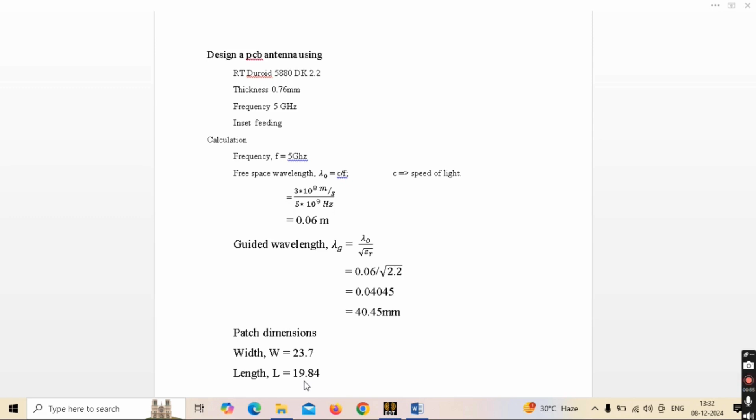calculations. I'm using a Rogers 5880 with a dielectric constant of 2.2 as the substrate material that has a thickness of 0.76 mm or 30 mil, and at 5 GHz our lambda is around 0.06 meter, whereas using the dielectric of 2.2 the lambda g, guided wavelength, will be 40 mm. So this is the patch dimension. You can do manual calculation or use online calculators to find it.

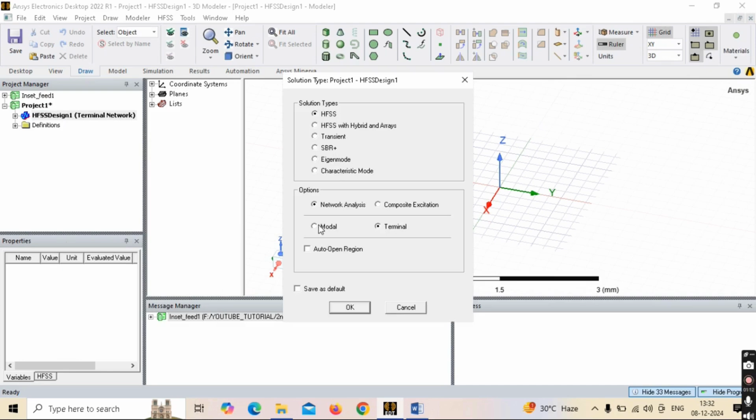So let's get started. I already designed it once. Let's start from scratch. So under this draw tab, I'll click on this rectangle and draw a rectangle. Then click on this rectangle, create rectangle, and here I can access the value. Usually I'll be keeping the dimensions as variables so that I can change them when and where needed. Let's keep the X axis as L. Let L be 19 mm.

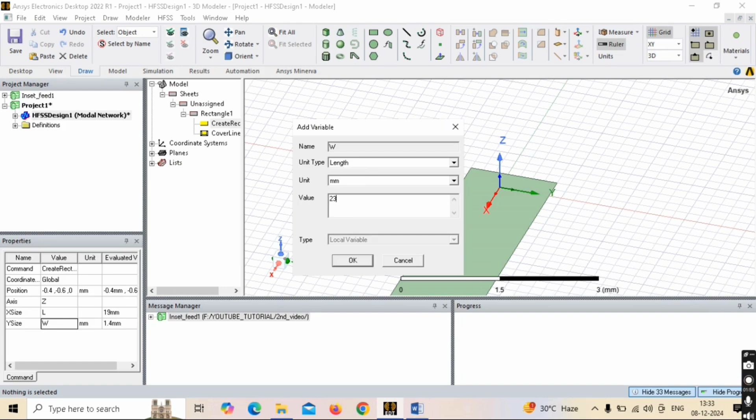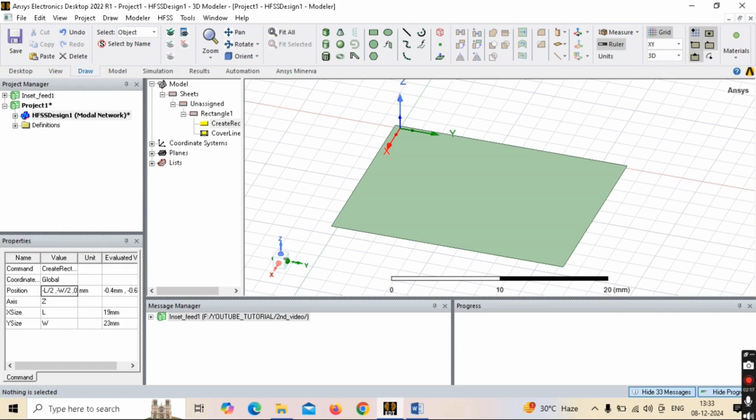Along Y, W to be 23 mm. Press Ctrl D to zoom out. Now again we have to center it. So this position I'll be changing. For X it will be minus L by 2. Along Y it should be minus W by 2. So I position my rectangle in the center. This is going to be my patch.

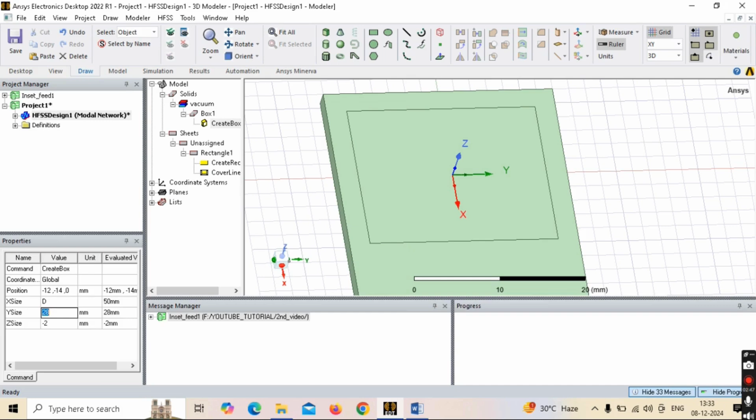Now let's create the substrate. The substrate dimensions actually depend on the scan requirement, but since here it is a single patch, I am giving an arbitrary value. Let's say 50 mm along both the axes. And the Z size should be the thickness of the substrate. Actually, there are standard sizes of substrate available, so you can check on it.

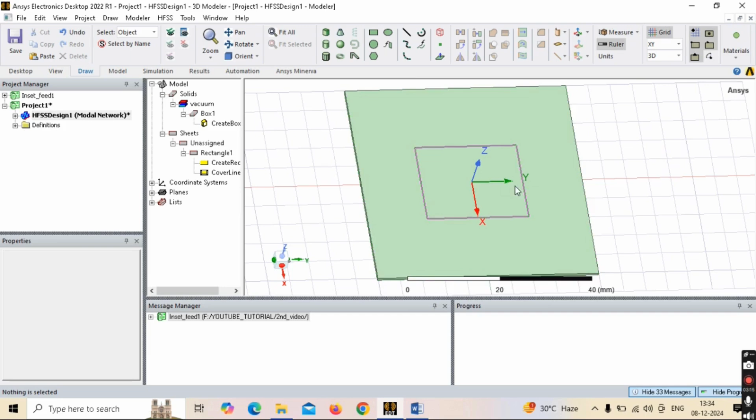Similarly, I'll be positioning it in the center, so the X position would be minus D by 2, and the Y position minus D by 2. Z should be at 0. So I got my substrate in the center. See.

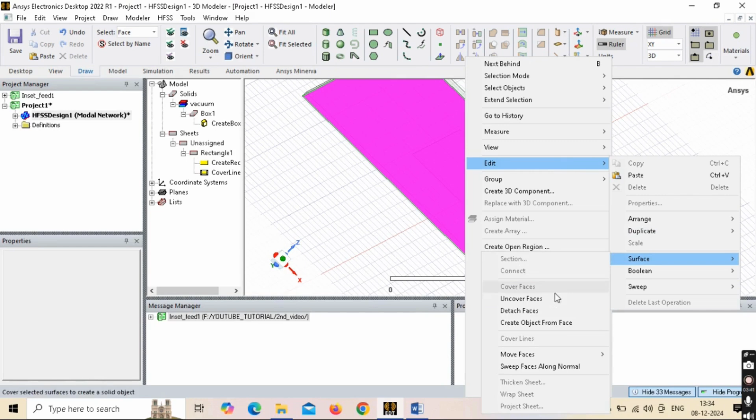Now let's create the ground. Actually, it depends on how you model. As you start modeling, you will find so many techniques. So here I'll select this bottom face. I'll click edit, surface, and create object from face. So I'll get a sheet at the bottom. I'll assign all the materials at the end.

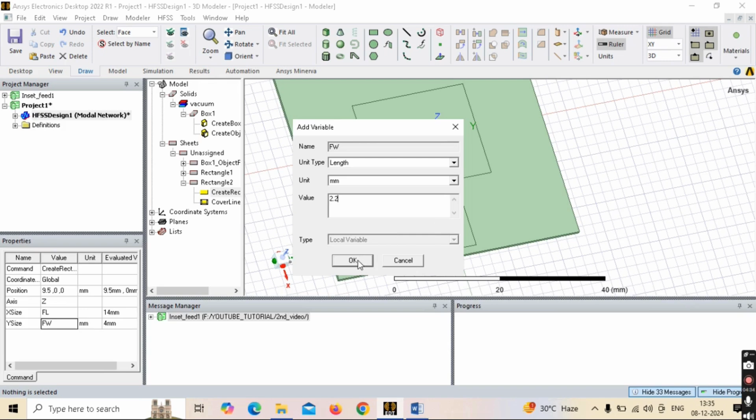Now let's design the feed line. Again, I'll click on the rectangle. I'll just draw an arbitrary rectangle because I'll be modeling the values inside these properties. Along X, it will be the feed line length, so I'll put FL. Let it be 14 mm. And along Y, it would be the feed width. This will be FW. And it should be 2.2 or something like that. Again, for the line impedance, you can use online calculators for a 50 ohm line.

Now let's position the rectangle. Along X, it should start at the edge of the patch, that is L by 2. And along Y, it should be minus feed width by 2. So now you can see the feed line has been positioned properly.

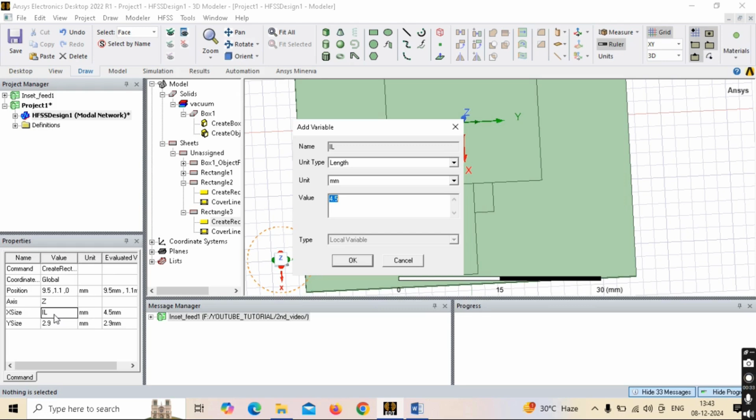Now I'm going to cut at this edge of the patch to make the proper inset feed. So again I'll create an arbitrary rectangle. Again I'll be modeling the values inside these properties. Along X, this will be the depth of the cut. So let us name it IL. Inset length will be 5.4, and Y will be the width of this cut. That will be IG. Value will be 2 mm.

Okay. So now I'll position it properly as needed. Along X, it should start at L by 2, and Y should start from the edge of the feed width, so it should be FW by 2. Let's see. But I need to take it towards the patch, so I'll make the X size minus IL. So it will go in the opposite direction.

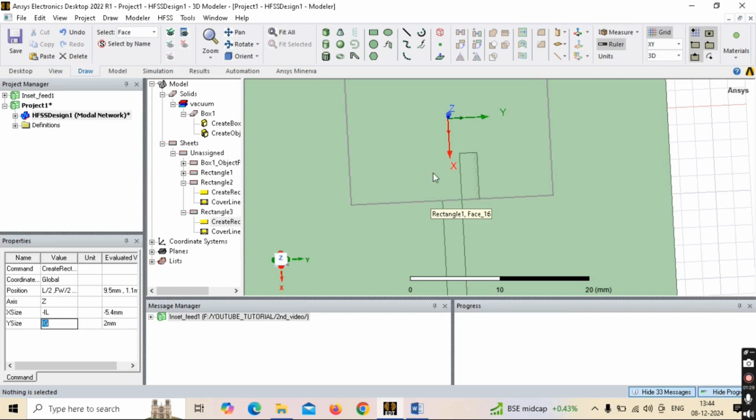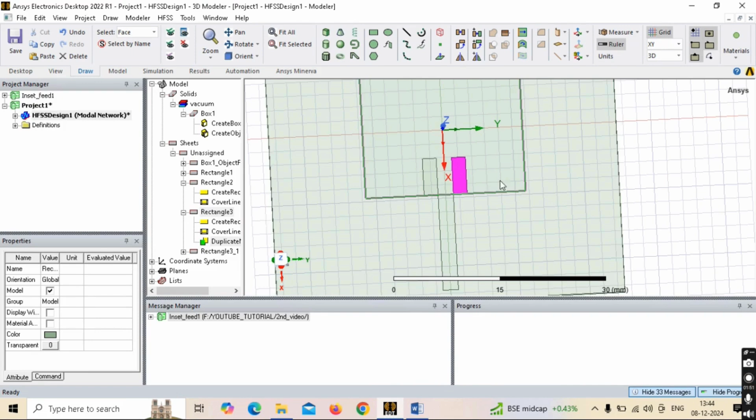I need to have a copy of the same thing on the other side. So I'll select this rectangle and choose mirror duplicate. I'll click at the origin and just drag my mouse towards negative Y, so that the rectangle is duplicated in the minus Y axis. So I have two rectangles which need to be etched out of the patch.

So now, first of all, I'll unite this patch and this feed line. Just a second, I'll select these two and click on this unite button. Now I need to etch out these two small rectangles for the inset feed.

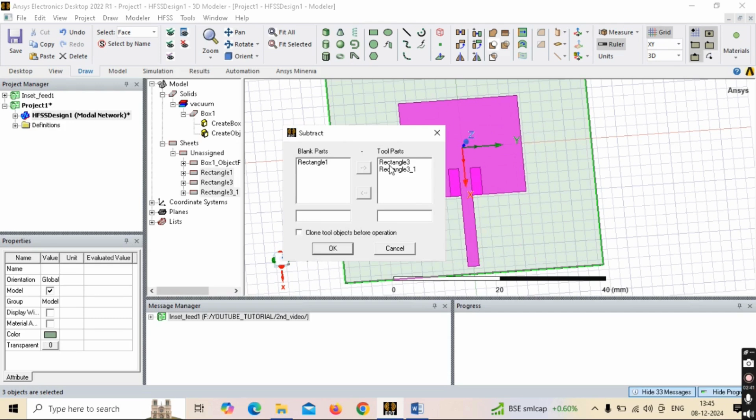So similarly, I'll select this rectangle, and also the two rectangles which I want to subtract. After selection, I'll click on this subtract button, and I'll put the patch as the blank part and the portions that I want to cut out in the tool part, and click OK. So you can see my inset feeding is almost done.

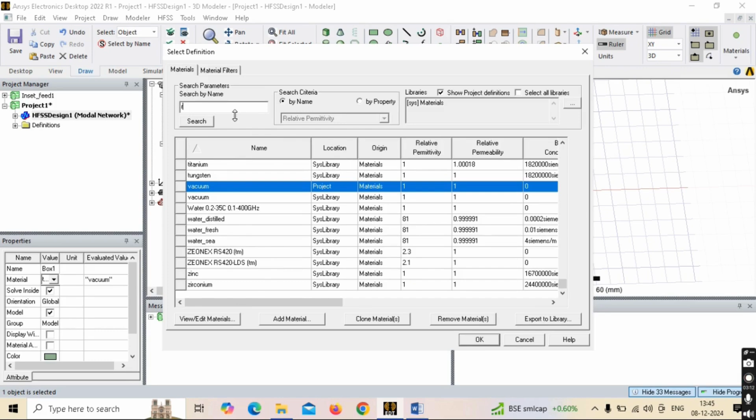So now I'll be assigning the materials. Let's select the object here. I'll select this box. This is my substrate. I'll click on the material, edit, and type Rogers. Okay. So it's been assigned with the proper material.

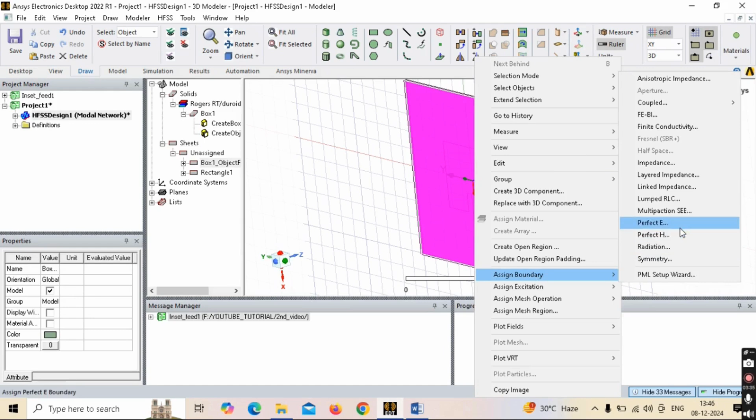Now this box one, this is my ground. So I need to make it a PEC. So I'll right click on my mouse and assign boundaries and perfect electric. Okay. Similarly, I want my patch to be copper or PEC. So I'll follow the same steps. I'll assign boundary and select perfect electric. Press OK. So you can see my sheets. These both are assigned as perfect electric.

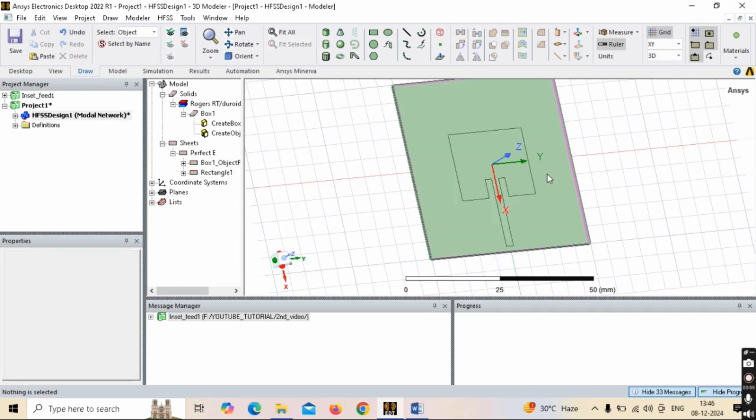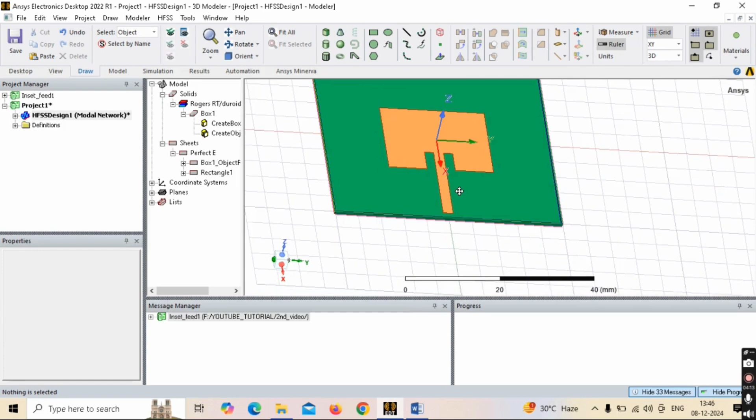Now let's just assign some color so that it looks good on the eyes. And my substrate. So we are almost done with the designing. Now I need to apply the feed. So what I'll do is I'll click on the rectangle. I'll change this to YZ because I need to go downwards. Create this rectangle, and the Y size should be my feed width, and Z should be minus 0.76.

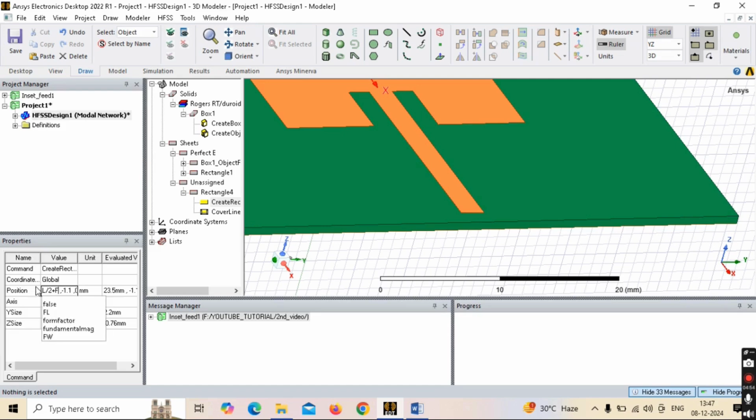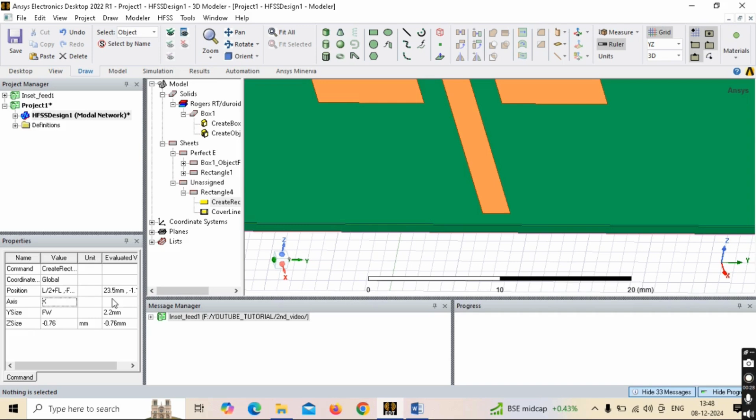That's the substrate thickness. The feed should run from the feed line to the ground, and the position along X has to be L by 2 plus my feed length FL. Now let's assign the required excitation into this rectangle. Let's also position it along the y-axis. Although it is positioned at the desired position, I'll keep it with the variables. It's done.

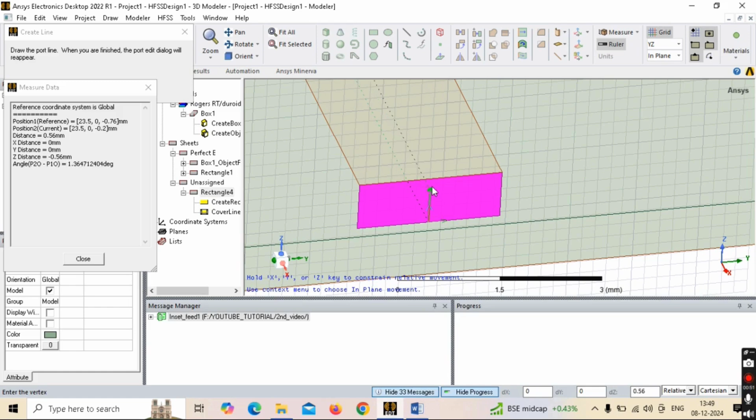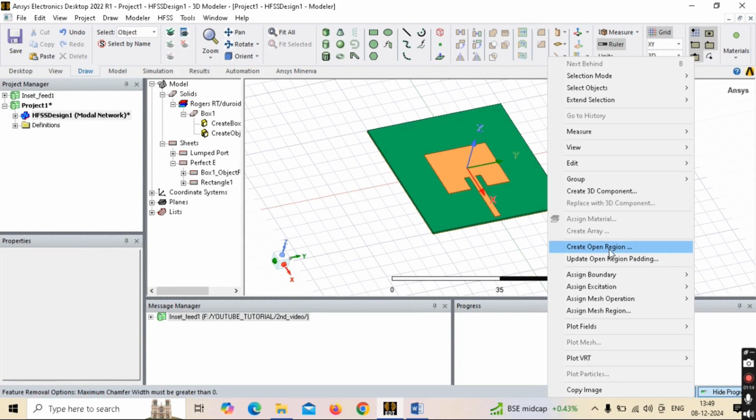So in order to assign, I'll click on this rectangle and right click on my mouse and assign excitation. Ports, lumped ports, 50 ohm. I'll define the line of integration running from the bottom to the top. That's done. And do not renormalize. The design part is over now. I'll create the surrounding medium, create open region. The operating frequency will be 5 GHz. The boundary will be radiation, and click OK.

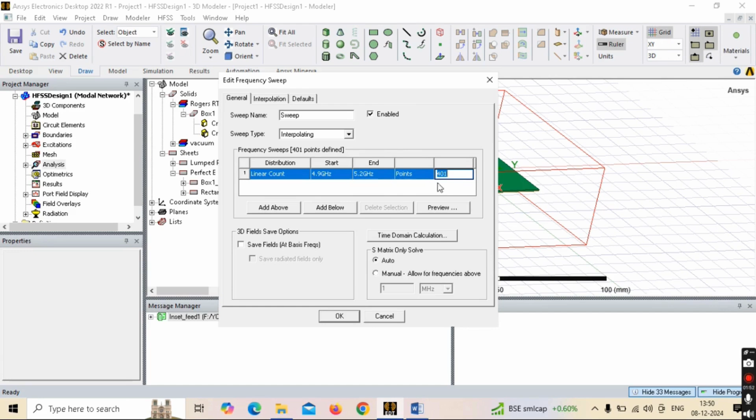Now at the solution setup, the frequency will be 5 GHz. Maximum number of passes, just increase it in case it takes more passes. Click OK. Now define the sweep. Because my patch is designed for 5 GHz, I'll put it from 4.9 to 5.2. Let's minimize it. Click OK. So I'm done with this designing, and let's simulate it. Let's save the file first. Let's save it here. Patch.

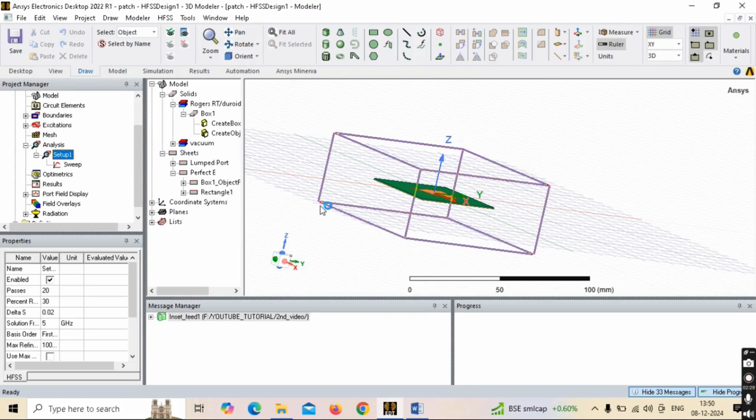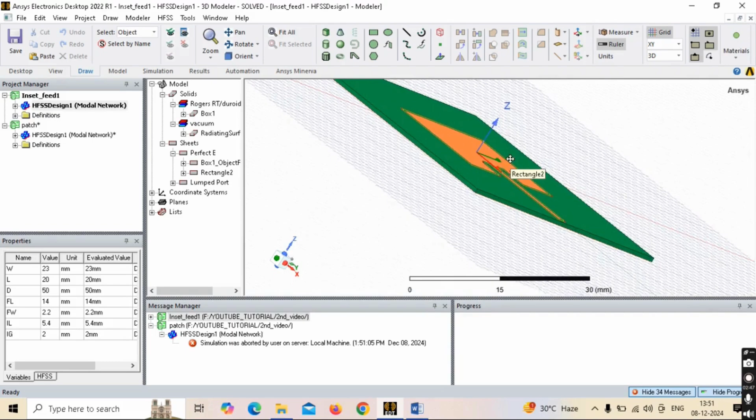Now let's analyze it. So I've already designed the same model. It's already simulated. I'll not wait for the simulation again. The same design, the patch antenna with inset feeding, the ground plane. There is a reason why I'm giving it a sheet instead of 3D for the patch and the ground. The simulation time is reduced.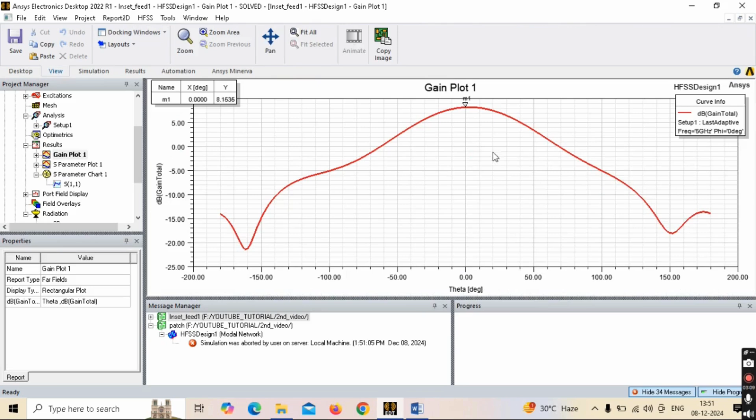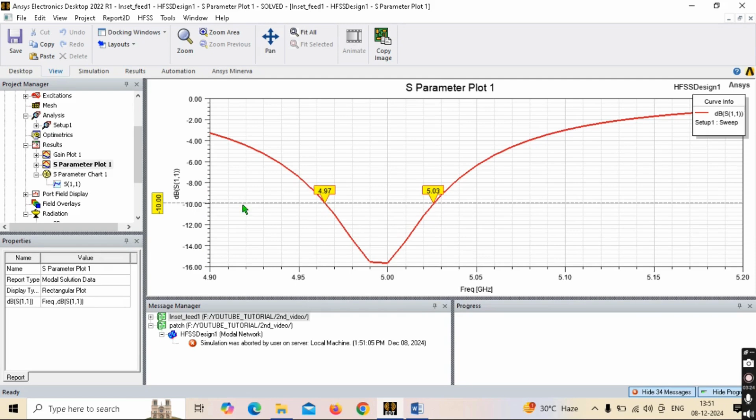So let's see the gain. I'm getting 8 dB gain, and the return loss, it's resonating at 5 GHz and has a bandwidth of 60 MHz. So you can improve this by fine-tuning the inset, this cut length and this gap, the feed line length. So you can optimize, and you can use the Smith chart tool to analyze where your curve is going.

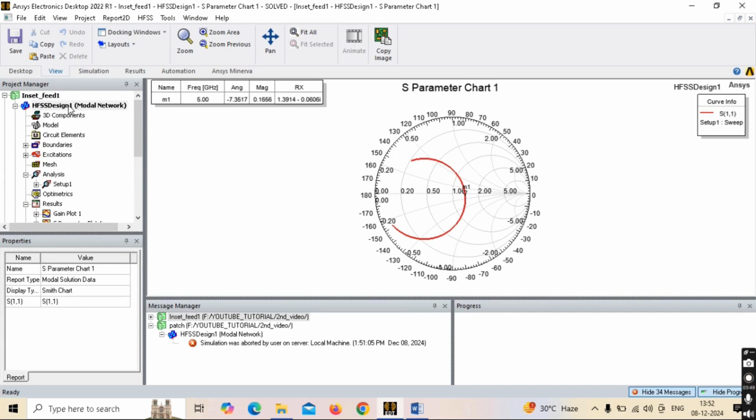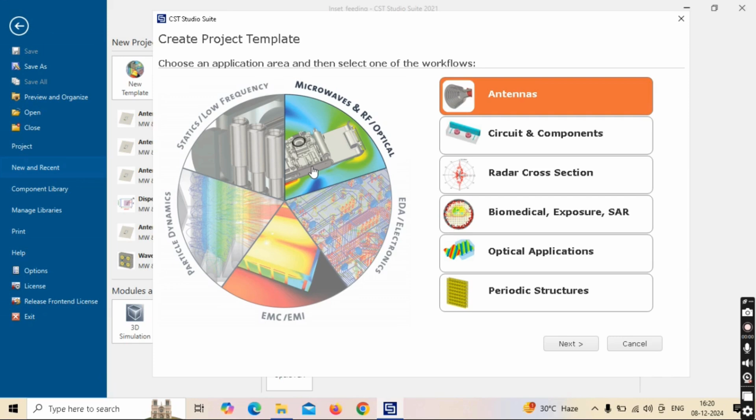So now I'm going to design the same model in CST. So we'll click on this new template, and then we'll have an interface like this. Here I'm going to click on microwaves and RF. And then antennas. Next. Planar. Next. I'm going to use frequency domain, that's recommended for resonant antennas, because patch is a resonant antenna. Units can be kept as it is. And min frequency, max frequency, this we can modify at a later stage also. So we'll keep these things as it is. Finish.

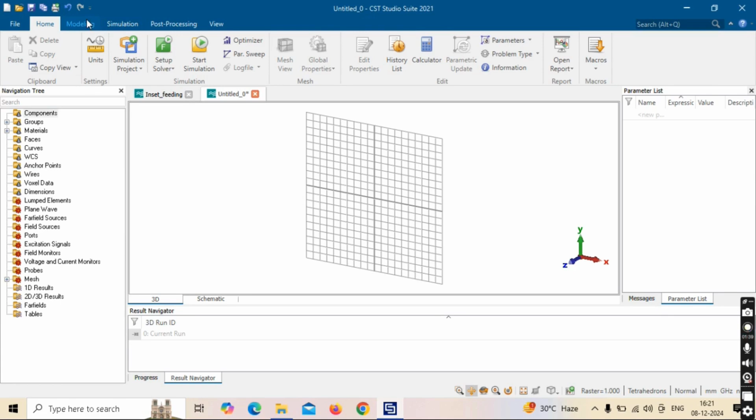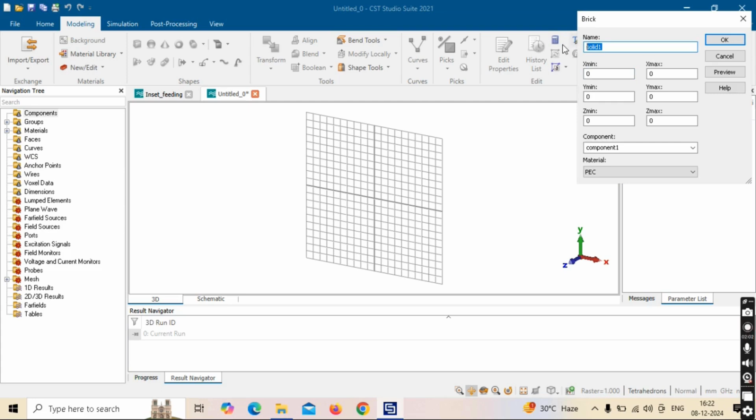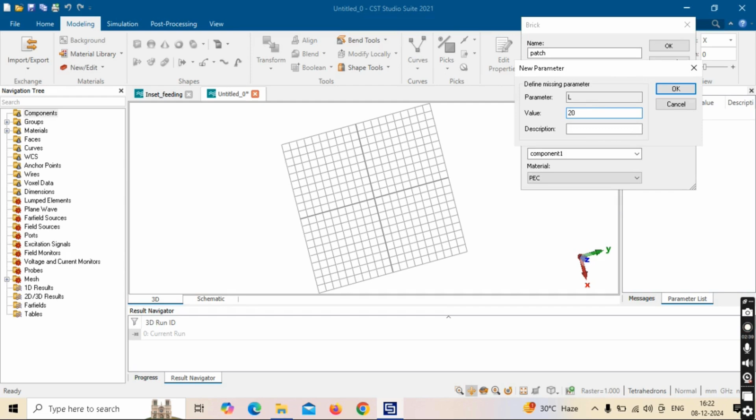Now we're going to click on modeling. Here we'll select this brick and press escape. So I can dial in my values or variables in this dialog box. So now I'm going to create the patch. I'll name it as patch. Along X, I'm going to have my length, so minus L by 2 to L by 2. Along Y will be my width of the patch, it is minus W by 2 to W by 2. And because I'm going to create a sheet, there won't be any height along the Z axis. The material would be PEC. Press OK. Put the values of L and width. So this is my patch. You can turn off this working plane.

Now we're going to create the substrate. So the dimension is minus D by 2 to D by 2. Same for Y. Along Z, I have to go minus 0.76 mm downwards, because that's the thickness of my substrate.

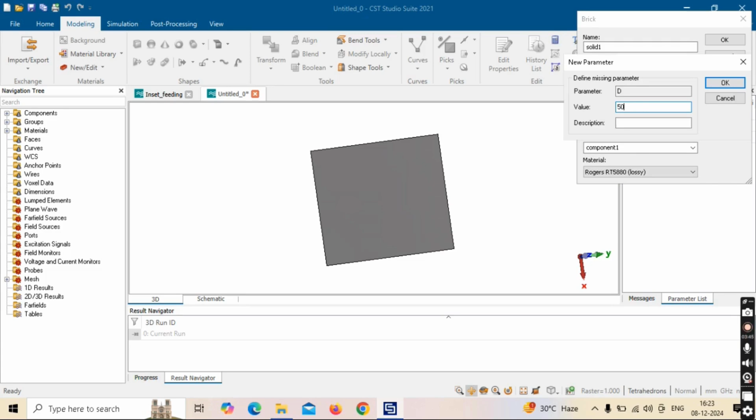Yes, we're done. D is 50. So just click on done and OK. You can press the space bar to zoom out.

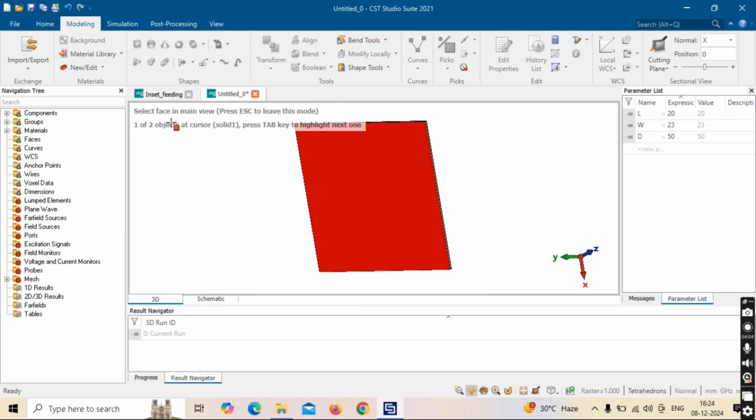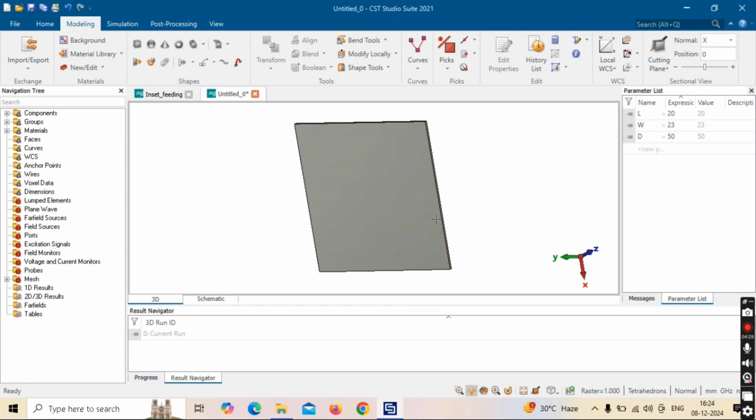Similarly, I'll have to create a ground plane here. So I'll click F, select this side of the substrate, and click on this icon, shape from picked face. So it's asking for the material. Since it's a ground plane, it has to be PEC. Press OK. So the ground plane is done.

Now I'm going to model the feed line. I can press on this block, press escape. Along X minimum, the starting point will be the edge of the patch. It is L by 2. It will go to feed length. So now for Y, it has to be minus FW by 2 to FW by 2. That's the width of the feed line.

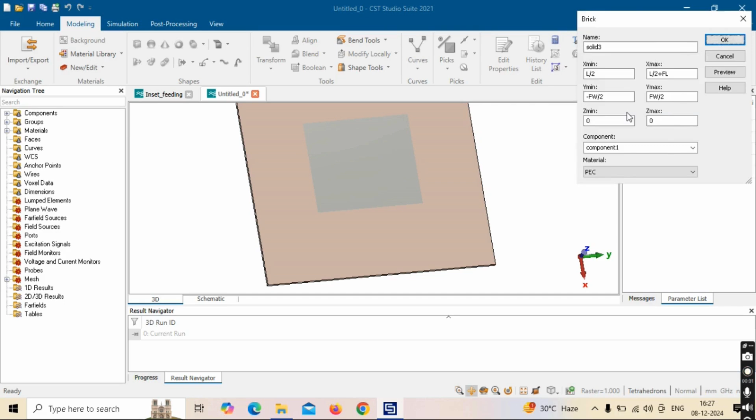And since again it is a sheet, it won't have any dimension in Z axis. And the material will be PEC. Press OK. The feed length is to be 14 and the width has to be 2.2. I'm keeping all the dimensions same as that in HFSS. So the patch and the feed line is done.

Now we have to cut out some portion from the patch. So we'll again click on this block, press escape, and then along X, that is my size of the cut, length of the cut. It will be starting from L by 2, the edge of the patch, and it will go inside the patch. It has to be L by 2 minus IL.

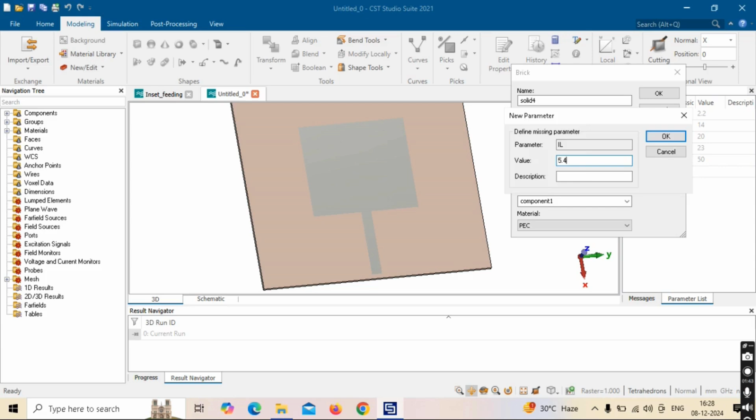Along Y, starting will be FW by 2. It will go till IG. Press OK. IG is to be 2. Let's see whether it's properly made or not. Yeah, it's fine. So now we'll need to etch out a similar portion from the other side of the feed line as well.

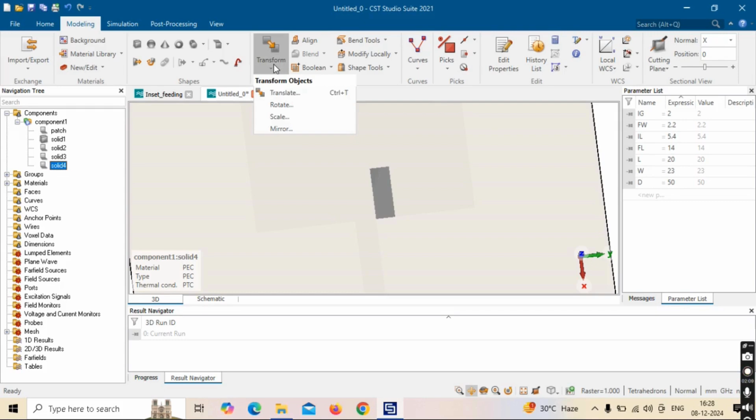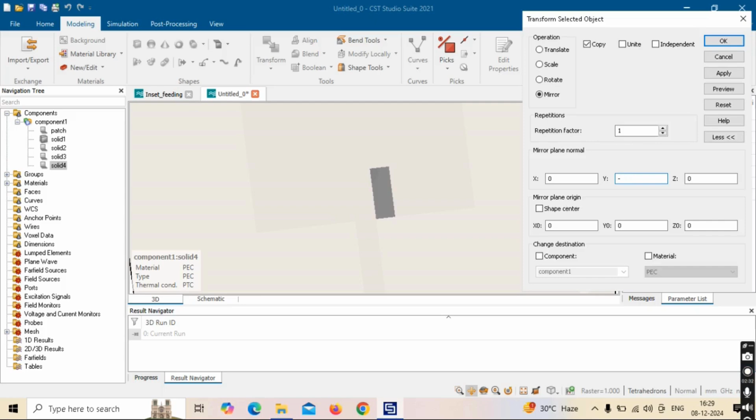So we'll click on this sheet and then click on transform and press on mirror. We'd like to mirror this and a copy, because if we do not select copy, it will just transform this shape. It won't create any mirror. Now when I'm checking this box, it will have one copy of the mirror, and I would like to mirror along minus y axis. So I'll press -1. Let's preview it first. Yeah, it's correctly done. Now we'll press OK.

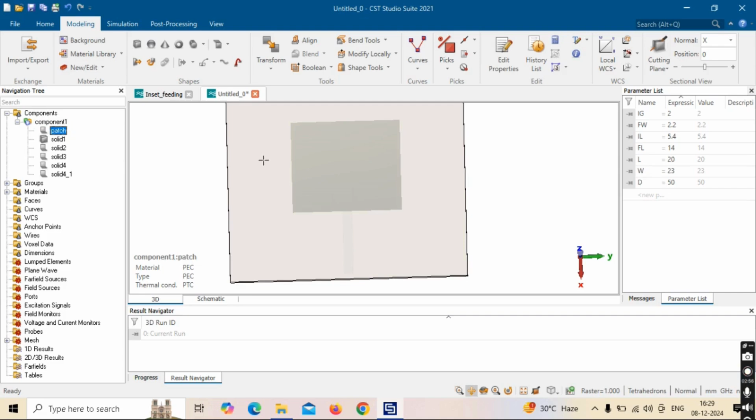So now I would like to add the patch and the feed line. In case of CST, we have to select one of the components, then come to this boolean and press add, and then select the sheet that I want to add. Select it and press enter. So now it is one.

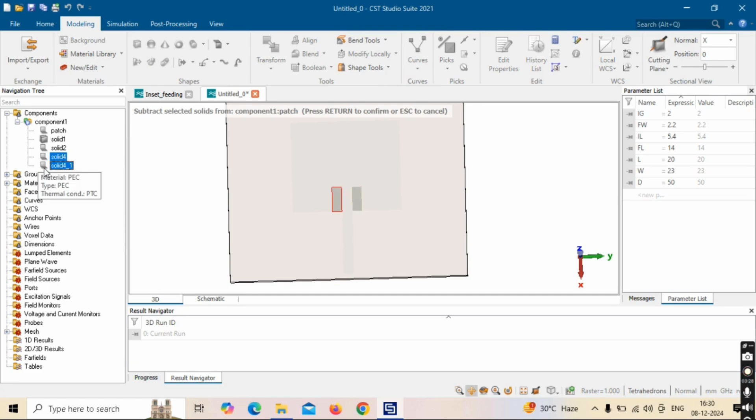Similarly, I would like to cut out these two portions. I've already selected the patch. Now I'll again go to boolean and press on subtract, and then select both of these components and press enter. So you can see that cutting has been done properly.

Now let's assign the excitation. So we have to create a rectangle over here. Again, we click on this block, press escape. Along X, the position will be L by 2 plus FL, both for X min and X max, because it will be a sheet running from top to bottom, and I don't want any thickness along X axis. And Y, feed width by 2.

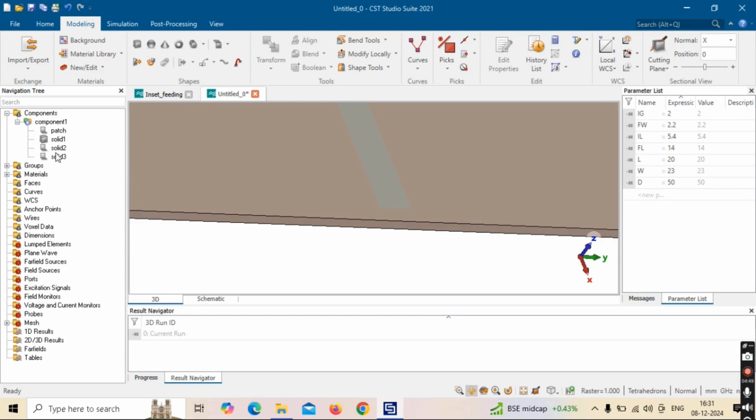For Z axis, the minimum will be minus 0.76. Let's keep it vacuum. That's okay. Again, press none. Oops, there's been a slight error. Let's check it. Double click on it. So the position along X, it is FL by 2 plus feed length. Oh, sorry, it should be L by 2. It is right, yes.

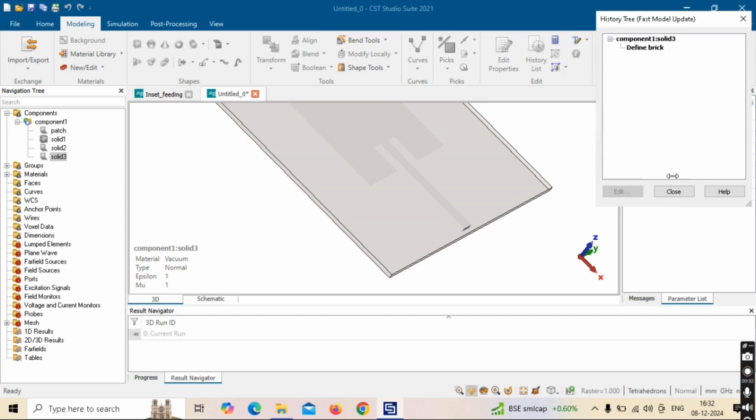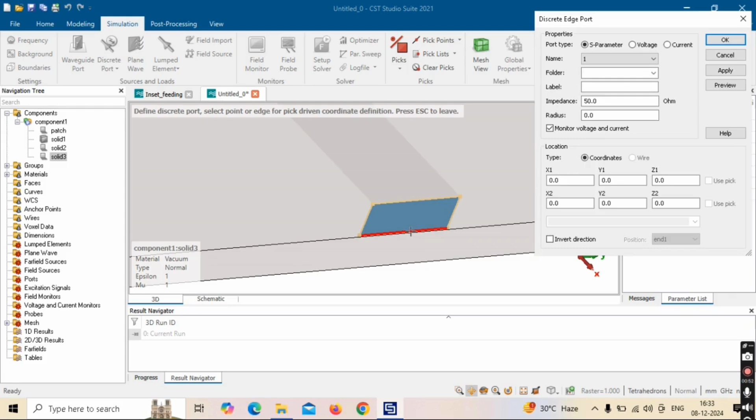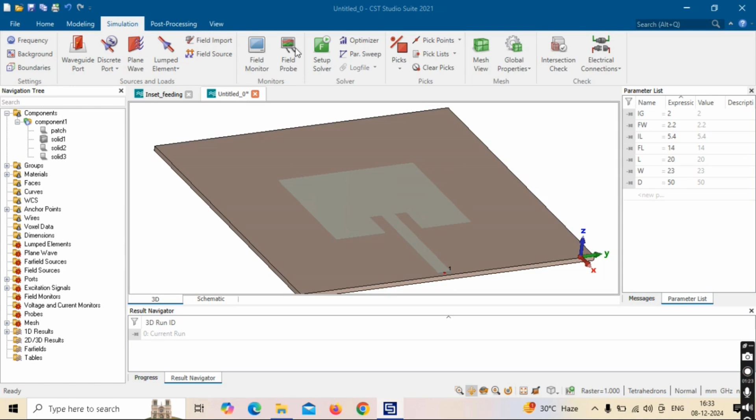Now I need to assign the excitation. For providing the excitation, we need to go to simulation, press on discrete port, and select the two edges of the rectangle. Let's look at this and hit the OK button. So we are done with the designing. Now we'll set the frequency 4.9 to 5.2. Press OK.

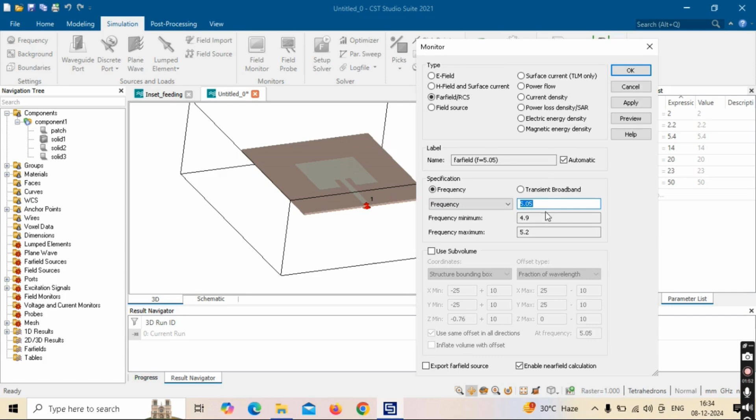Unlike HFSS, we need to define here what fields we want to check. So for that, I'll hit on the field monitor, and here we get all the available components we may want to see, either electric field or surface current. I just want to check the far field. I'll click on far field, set the frequency to 5.05 GHz and apply OK. That's it. Now I'm going to simulate this. To simulate, I'll click on Setup Solver and click on the Start button.

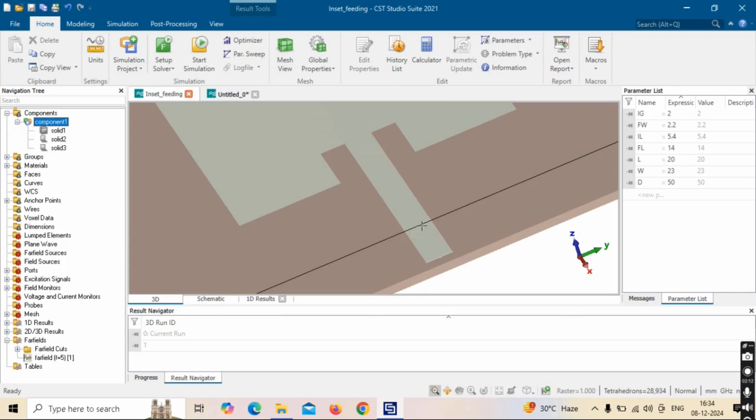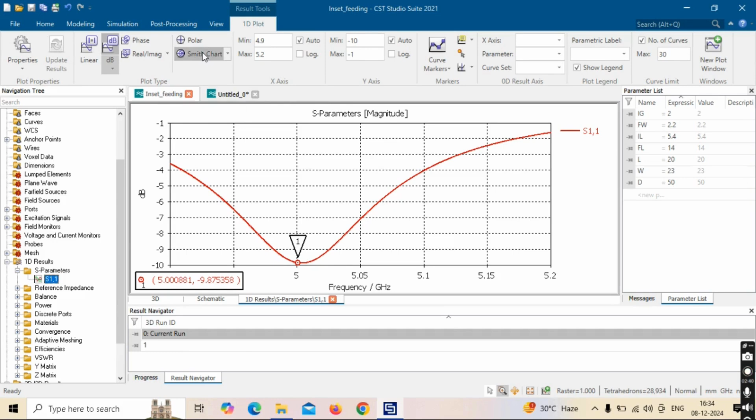Okay. So the same design has already been modeled and simulated. We'll just go and check the results. This is the S parameter, the S11 return loss. Let's check in dB. So it's resonating at 5 GHz, but the matching is not as proper as we saw in HFSS. We can also see in the Smith chart that it is shifted away from the matching point. So it needs fine tuning again. The purpose of this video is just to show you how to model, not to get the exact results. We'll come up with such a video in the near future.